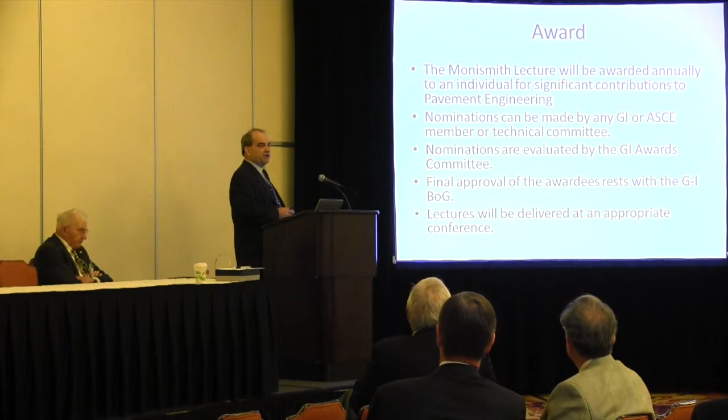So the first awardee is Professor Monismith himself.

Before I start, I'd like to first thank the Pavement Committee for establishing this award. I think it's very important that pavement engineering be brought to a higher status within the geotechnical field. Secondly, I'd like to thank the committee that generated the funds. Gary Hicks was the chair, but Rita Leahy and Jeff Hilliard were involved too. If they would just stand for a minute, I'd like to thank them.

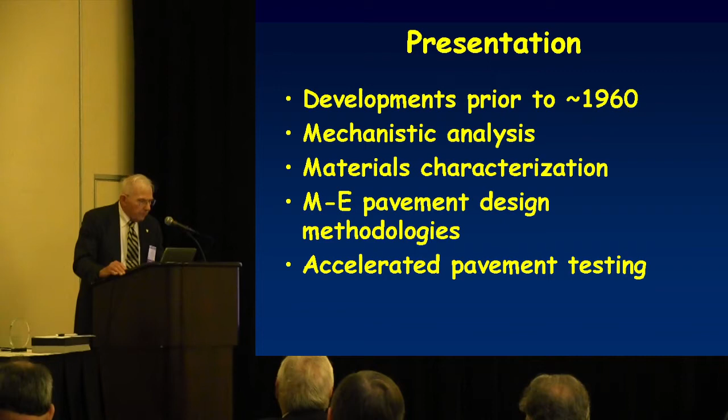I'm going to talk a little bit about the developments prior to 1960, then mention mechanistic analysis briefly, materials characterization, pavement design, accelerated pavement testing, which has become a very important part of the process, non-destructive pavement evaluation and overlay design, improved construction—because if pavements are not properly constructed, then everything goes to the devil—and then briefly pavement management, which has become very important in making sure we take care of our systems. And then I'm going to make a few observations on pavement engineering education and training.

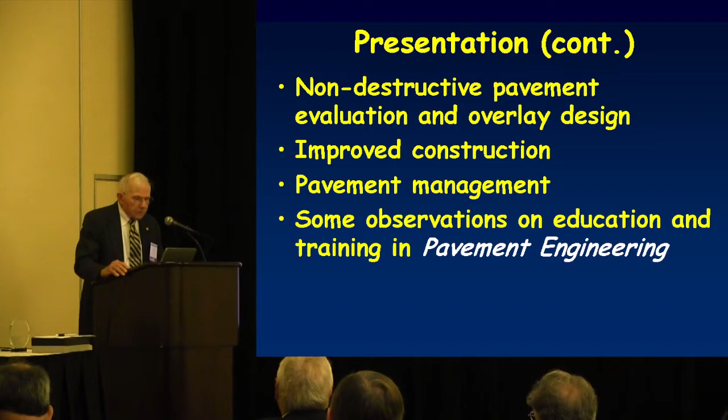I think there are some developments. I've just picked a couple of these very important ones, particularly the Corps of Engineers work in the 1940s and 50s at the Waterways Experiment Station: the use of Boussinesq analysis in pavements, full-scale testing at 13 test sites around the United States, and the use of the CBR, because there was nothing better than that at the time.

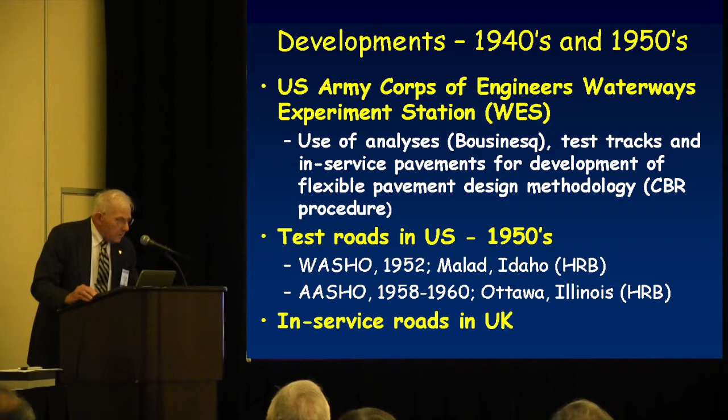Then second were the test roads in the U.S., particularly the WASHO test road in 1952, and then very importantly the AASHO road test, which really sparked renewed interest in pavement design from about that period of time. And then, of course, also in the late 40s and early 50s, the UK was doing a lot of studies of in-service pavements.

One of the key people at WES was Dick Ahlvin, and very importantly Bill Turnbull, who had been a very important part of the group. The AASHO road test really sparked the whole process, and the engineer in charge of the program was Bill Carey.

He was the engineer on the job, and he really did a very good job. He shielded his engineering staff from an advisory board that wanted to do many, many things. He really did a great job, and he also became chairman of the Transportation Research Board, or whatever you called the director at the time.

Sir William Glanville was the director of the Road Research Laboratory, overlooking some of the people who did the road studies. One of these was David Croney, and he, along with Glanville, participated in an event that I'll be talking about in just a minute.

Then a very important person who made significant contributions is right here in California: that was Francis Hveem. He introduced the idea of load equivalencies—it really didn't start with the AASHO road test, but rather with Francis. He stressed the importance of the tensile characteristics of pavements.

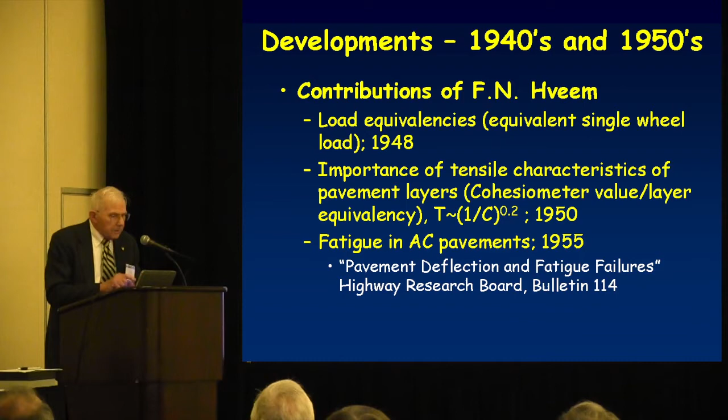Before, there was nothing given to the asphalt concrete—they just put so much above the subgrade. Then he brought about the development of the concept of fatigue in pavements. I think one of the classic papers in pavement engineering and soils is his paper in the HRB. This is Francis Hveem, materials engineer for a number of years.

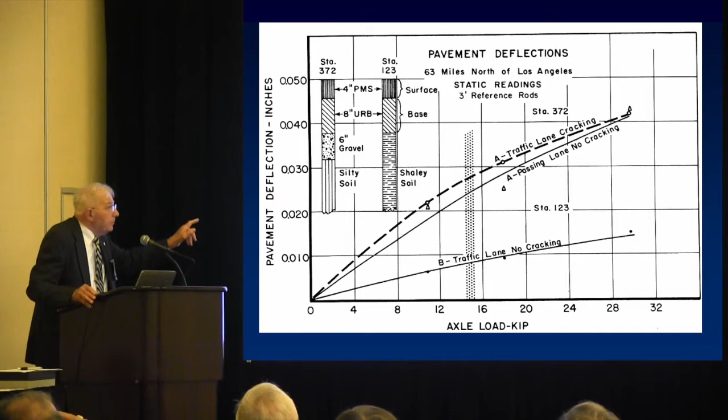In this particular case, looking at the slide, you'll see the two A figures and then the B figure. The B figure had very low deflections and heavy traffic, but no cracking. The other had higher deflections, and again, small traffic in the passing lane, but heavy traffic. This really sparked the idea of looking into the fatigue of asphalt concrete, which then led to this whole process of mechanistic empirical pavement design.

And then really what sort of gelled everything was the International Conference on the Structural Design of Asphalt Pavements in 1962. This was held at Ann Arbor, Michigan, and many people from around the world came to this conference. It was sponsored by the Asphalt Institute.

Jess Buchanan was the president. Fred Finn was really the workhorse at that time, and he had been the Asphalt Institute representative on the road test. Then they worked with Bill Housel and Ward Parr and developed a conference that really got the whole thing going. This is Jess Buchanan, Fred Finn in his younger period, Bill Housel, and Ward Parr.

And then some of the early U.S. participants: Gene Skok had actually worked on the road test and was involved at the Asphalt Institute before he went to the University of Minnesota. Bill Goetz of Purdue University, E.J. Yoder of Purdue University, and then some international participants, Norm McLeod from Canada.

Nijboer from the Netherlands. I can remember I met him at the lab, and I went home and told my wife that this is the hand that shook the hand of Nijboer. And she said, so what? But he was a great pavement engineer.

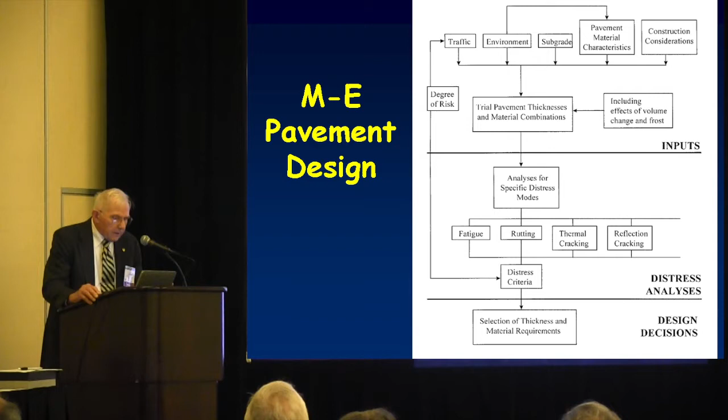Today the primary modes of distress are fatigue in the asphalt concrete or possibly in other treated materials, rutting and thermal cracking, and then also, particularly for overlays, reflection cracking. So you put this all together and you find out how the best combination of materials can be attained and developed along the life of the pavement.

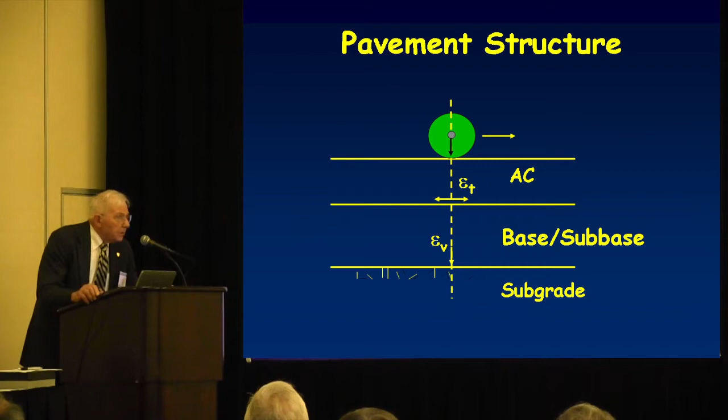In the case of the development of asphalt pavements, a very simplistic representation is a structure of this type. We have the tensile strain at the bottom of the asphalt concrete or some treated layer, and in this case, we show the vertical compressive strain at the surface of the subgrade. Many of the design procedures that evolved from a mechanistic empirical standpoint were built on these principles.

One of the important analyses that developed was the ability to look at multi-layer elastic analyses. Burmister had done this in the 1940s, but we didn't have electronic computers at that time. In 1965, Chevron developed a multi-layer program that was very effective. I don't think they really received the proper credit for this, but they developed this, and it led to the program ELSYM and other developments.

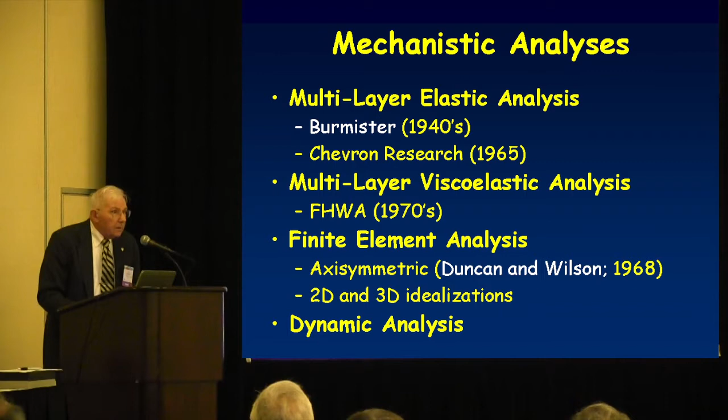Now, in terms of material characteristics, we can start with the asphalt. This material is a nonlinear, rate-dependent material. So how do you treat it? Well, we treat it in terms of stiffness, where we take into account the effects of time of loading and temperature, and try to utilize that information in the design using primarily elastic systems today in the design methodology. Some of the key people doing this in the early 1950s were Van der Poel, and then Heukelom and Klomp.

And of course, the untreated materials are also nonlinear, not so much rate dependent, but we still try to, in an ad hoc manner, use properties that we get from laboratory testing or from field testing to get a measure of moduli that we can use in these multi-layer elastic analyses.

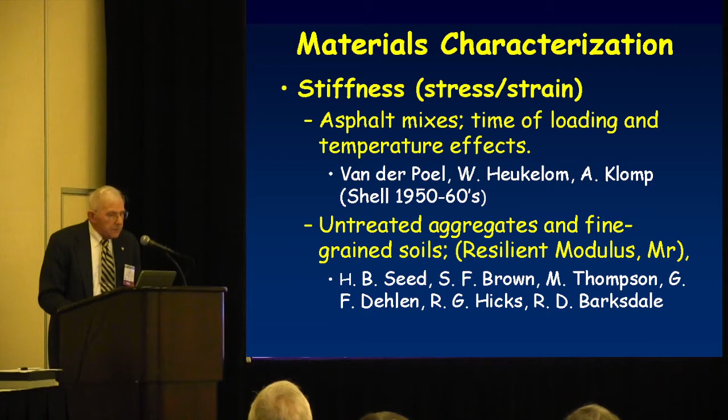And some of the people involved are Harry Seed, Steve Brown from Nottingham, Marshall Thompson, George Dehlen, Gary Hicks, and Dick Barksdale.

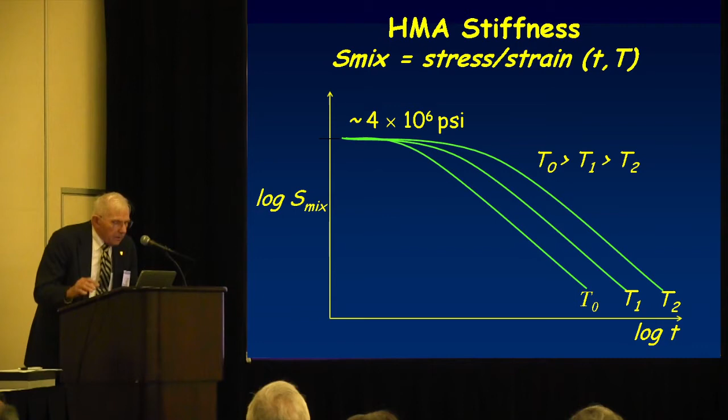Generally, when you look at the stiffness of asphalt mixes, the behavior at very short times of loading is about the same as concrete, and at low temperatures, and of course, longer rates of loading or longer times of loading, then the moduli drop off. You can see how this happens. The temperature T0 there is the highest temperature, and T2 might be something much less.

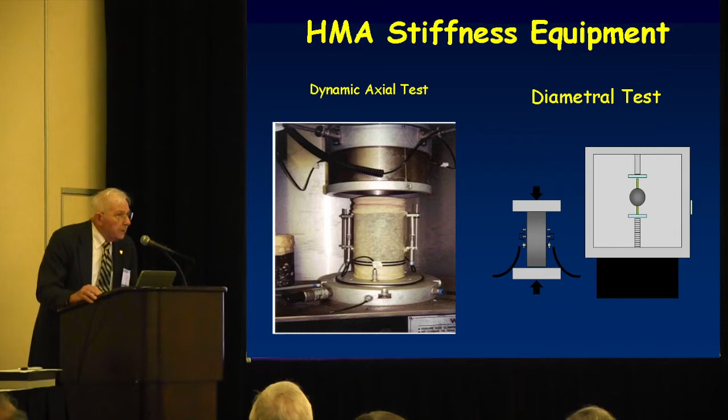Now, in the case of fine-grained soils, we realize that we have to consider the water content, dry density, soil structure, the applied stress, and today we measure it usually in terms of repeated load triaxial test and a resilient modulus developed. Actually, Harry Seed introduced this in the early or late 1950s.

And of course, we have to consider then, particularly not necessarily saturated soils, but partially saturated soils. So we have to also look at the matter of suction and then freeze thaw.

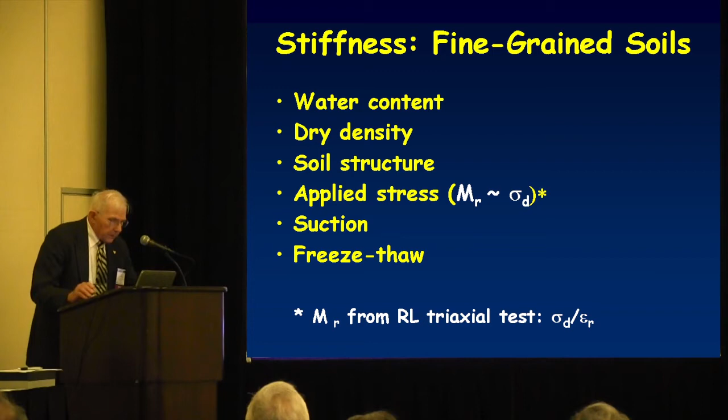And in the case, as I say before, the modulus of resilience is developed from repeated load tests, where you take the deviator stress divided by the recoverable strain.

And Harry Seed, of course, was a good soil mechanics person, but I show my age when I talk about soil mechanics rather than geotechnical engineering. So.

And he started the resilient modulus testing, and his work led, of course, to then the dynamic loading that got involved for liquefaction. Steve Brown did work for looking at various states of stress, including suction. Marshall Thompson did very good work on the freeze-thaw behavior of soils.

And of course, very importantly then, we have to recognize that when we're doing the materials for pavements, specimen preparation is very important. And of course, what are going to be the conditions? Well, the Corps of Engineers for the CBR test use saturated soils. But we have to realize that many soils don't become saturated.

And the Australians and the UK Road Research Laboratory did a lot of work on measuring soil moisture suction and for partially saturated soil. So some of the designs that we use are based on soil moisture suction considerations rather than saturated soil behavior.

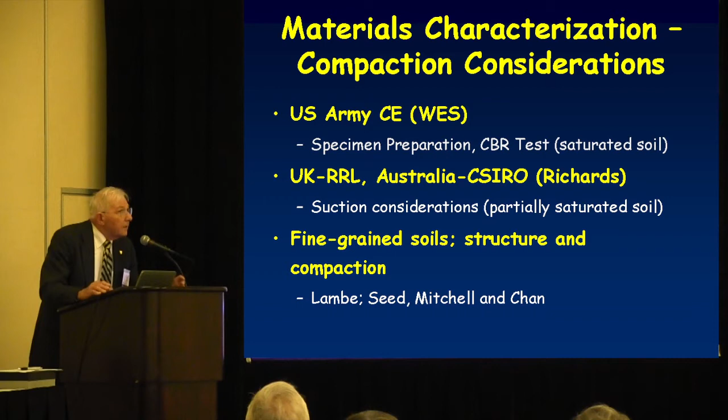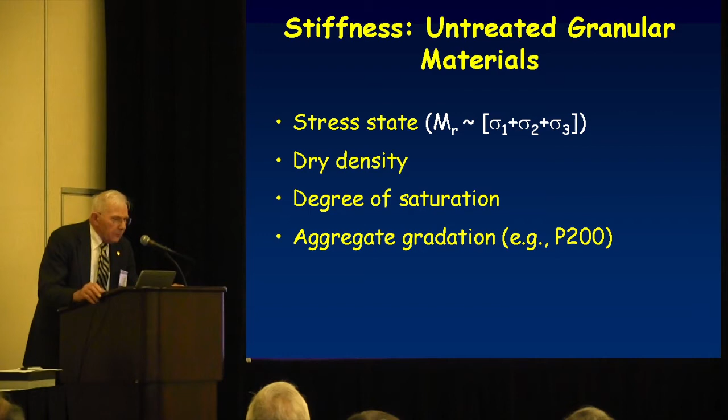Then for the untreated granular materials, we have to recognize again that this is a nonlinear material, but a modulus, again, measured in a repeated load type test, is a function of the sum of the principal stresses. And of course, dry density has an effect, the degree of saturation, and the aggregate gradation.

And some of the people that did work in this area were George Dehlen from South Africa, Gary Hicks, who's sitting here in the audience, and Dick Barksdale, who unfortunately died at an early age.

And so then the next thing that we have to do is we have to take this information and put it into these analyses to make distress analyses. And so the three that I've mentioned to you are fatigue cracking, primarily hot mix asphalt, permanent deformation, rutting, thermal cracking, primarily low temperature cracking.

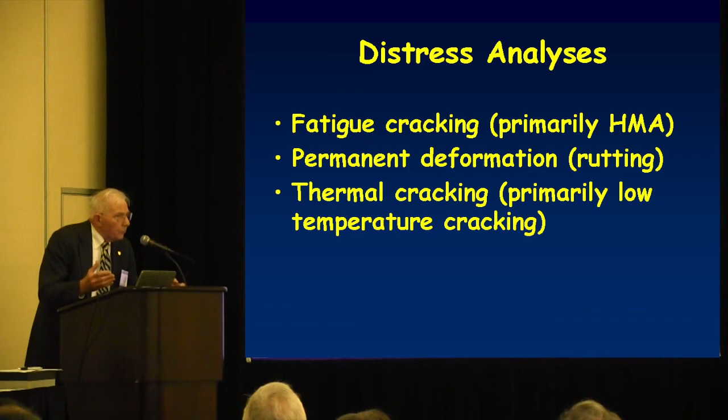Well, in the case of thermal cracking, primarily the binder selection has become very important today. And with the new grades of asphalt that we have, we've mitigated to some extent this problem of thermal cracking if you choose the proper materials and you properly compact the pavements.

And so in the fatigue test development, this occurred both in Europe and the United States. Shell supported the work at Nottingham, and Peter Pell, one of the really very important people in this area, and R.N.J. Saal was from the Dutch KSLA.

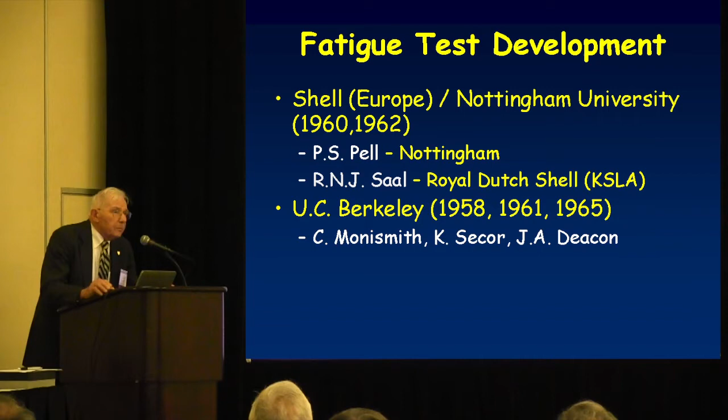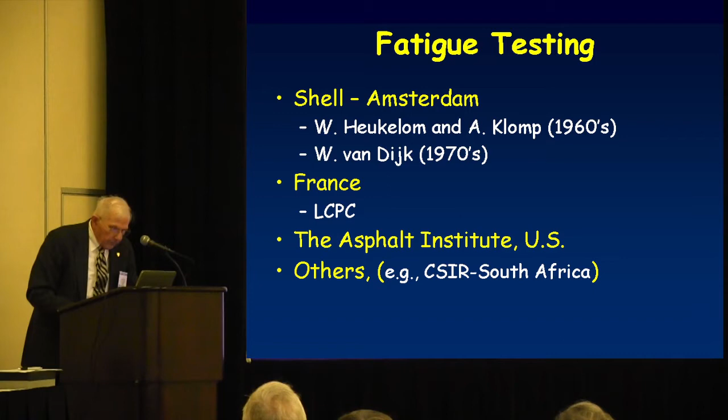And then the fatigue testing also expanded. Shell did a lot, Heukelom and Klomp, van Dijk in the 70s. France did a lot of work, the LCPC in Paris, the Asphalt Institute, and then others, for example, the CSIR in South Africa, and we'll see more of that a little bit later.

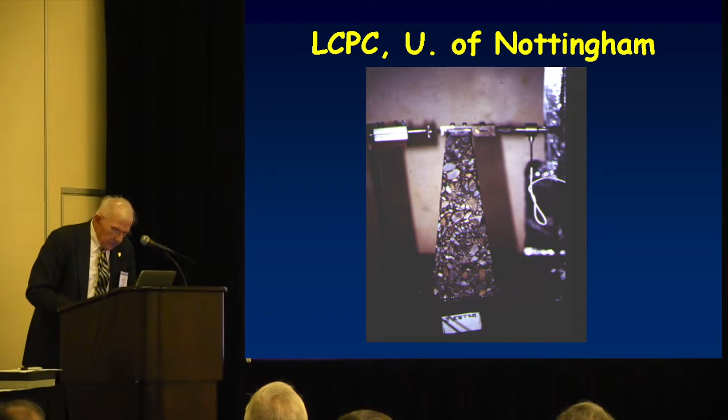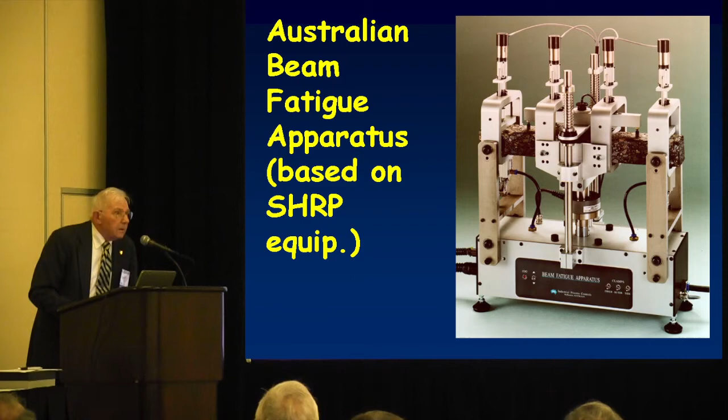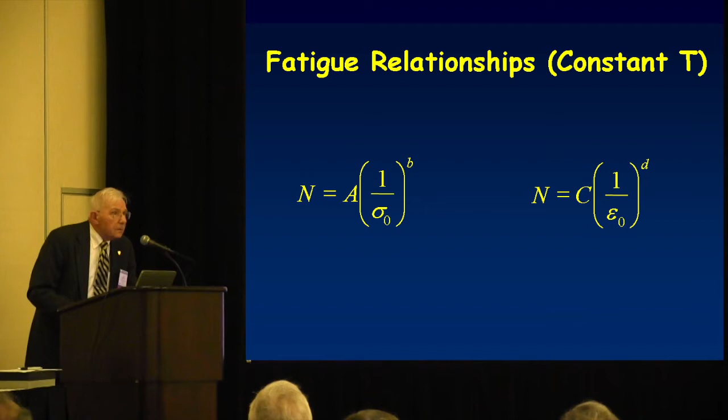And then it so happens that the fatigue of mixes can be inversely proportional to the stress or the strain. And normally we use the strain. It's a measure that we can actually look at. And they say happiness is a straight line on a log-log plot. And so in this case, at least over some range, the strain is proportional logarithmically to the number of cycles to failure. Normally you should plot this the other way because strain is the independent variable and NF is the dependent variable, the cycles to failure.

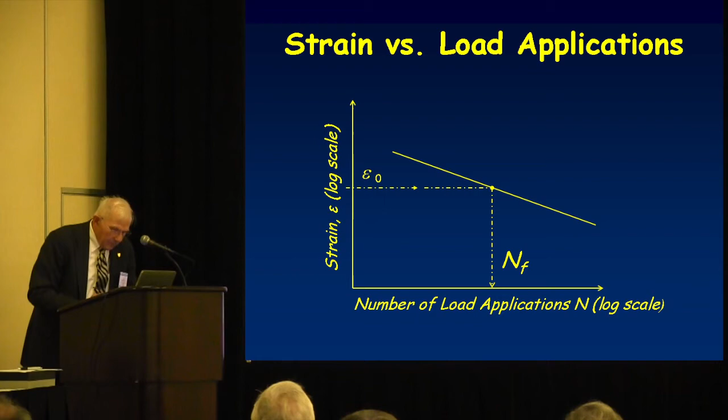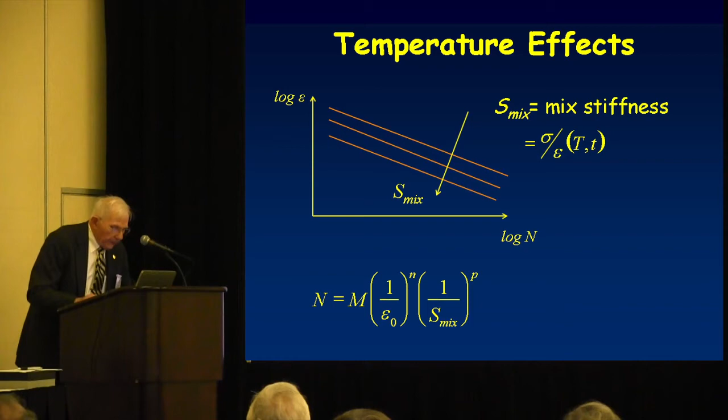But we use that then in design, and we have, of course, temperature effects that we have to consider because asphalt is a thermo-rheologic type material. And as the stiffness increases, as you look at the slide there, the strains at break go down. And so generally we have an equation of the form that you see, where the cycles to failure is a function of the strain and the stiffness of the mix. And there are other factors that will be involved in this as well.

And then, of course, the problem is that traffic is going to have different load levels. And so how do we combine these? The concept of the linear sum of cycle ratio, some people refer to it as Miner's hypothesis, was suggested by Ken Peattie of Shell. And actually Jack Deacon then did a very detailed study looking at load effects in different sequences, and it seemed to be reasonable.

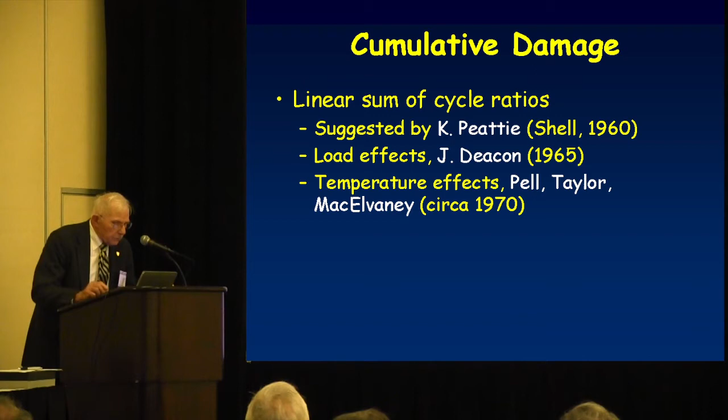Now some people argue that this is not a very good system, but it works from an engineering standpoint. And you have to realize that in any kind of field, when we're doing designs, we have to think as engineers and not as scientists. We have to make sure that we can get something that is going to provide a reasonable answer, and this seems to do that.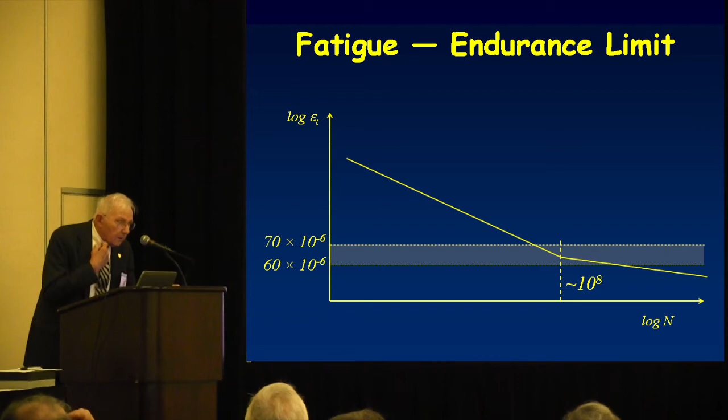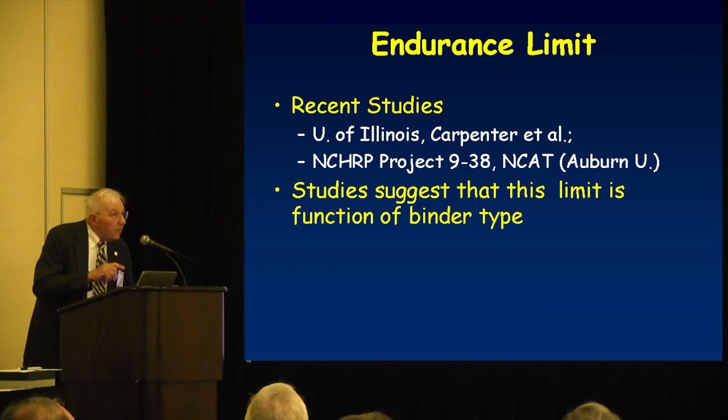So people have been looking at that more recently, and very nice work has been done at Illinois by Carpenter and the NCHRP projects. These studies have indicated that maybe, depending on the type of binder in the mix, there may be different strain levels where this might happen. And of course, then we always have to throw in a booger factor, and we call it a shift factor, to relate the behavior in the laboratory to the behavior in the field.

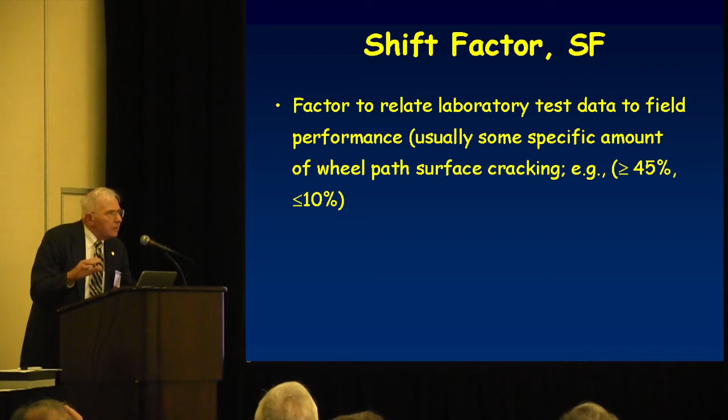And so some shift factor format is developed, and we relate it to some percentage of cracking in the field. Normally, in the case, for example, of some procedures up greater than 45%, others 10% or less. And normally when you get up to about 10% cracking, the pavement is sort of on the verge of failure.

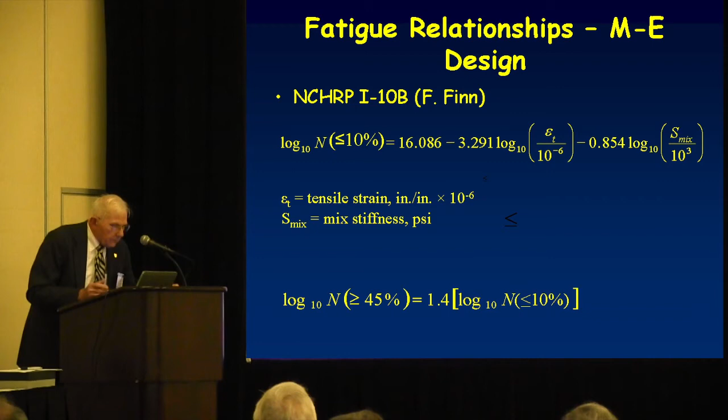Now, this is one of the first works supported by the NCHRP to look at mechanistic empirical design, and it turned out that Fred Finn developed the relationship that eventually was also used by the Asphalt Institute. You can see then the inverse ratio to strain, the inverse ratio to stiffness, and the fact that when you look at 10% cracking versus 45% cracking, there's about a 40% difference, at least for the data that were available at that time. These were based on thicker pavements, 4 inches or more. And then Matt Witczak, when the Asphalt Institute adopted this formula, then added the capability to bring in the effects of the asphalt content and the degree of compaction of the mix, which is a very important consideration.

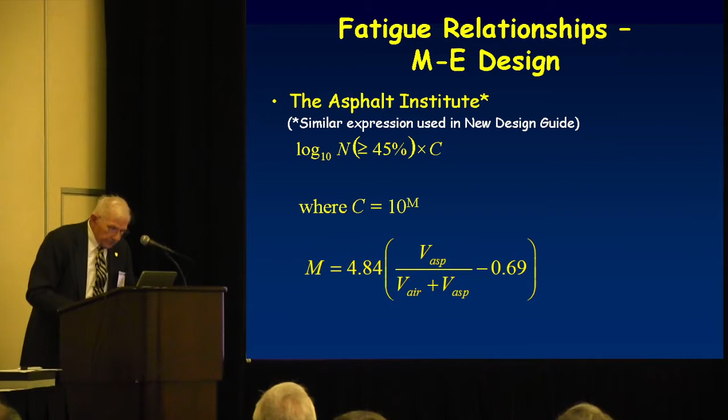The fatigue relationship used today in the MEPDG has this form: there is a factor for the mix volumetrics, the strain, and the stiffness. This is a design relationship that seems to work pretty well.

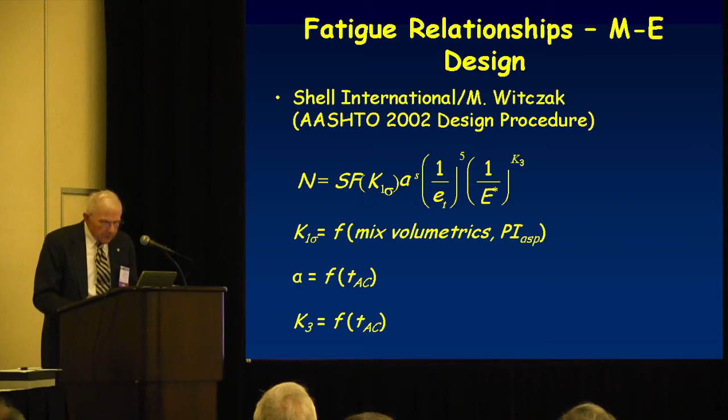Permanent deformation is also a factor that comes into play, and we have to make certain that the pavement components don't contribute very much to deformations at the surface, because if you develop rutting and you have rain, you have the possibility of hydroplaning. So we have to be very careful about that.

In the case of the untreated components, the load stresses and shear stress at the surface of the asphalt or the aggregate base and subgrade are a factor.

Another factor I've alluded to in the past is the vertical compressive strain at the surface of the subgrade. This was suggested by Dormon at the 1962 conference, and Shell really had, at that time, a scheme in mind for a mechanistic empirical design procedure, which involved the vertical strain and the fatigue in the asphalt concrete.

For the asphalt concrete itself, primarily shear deformations occur that lead to rutting, and this is in the upper part of the pavement surface, the upper 4 inches in highway pavements, probably a little thicker for airfield pavements. This can be controlled primarily by mix design and construction, but we still have to make some estimates of the actual rutting that might develop.

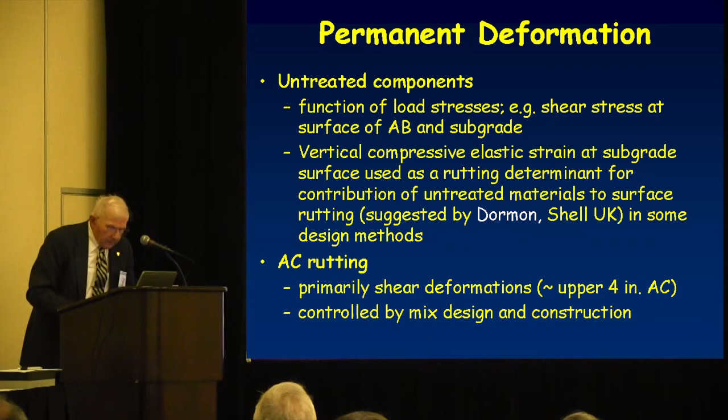These can be considered as part of the design procedure, and if you're going to be developing long life pavements, you might think in terms of the endurance limit in the asphalt concrete, and also this endurance limit in terms of the contributions of the untreated materials to deformation at the pavement surface.

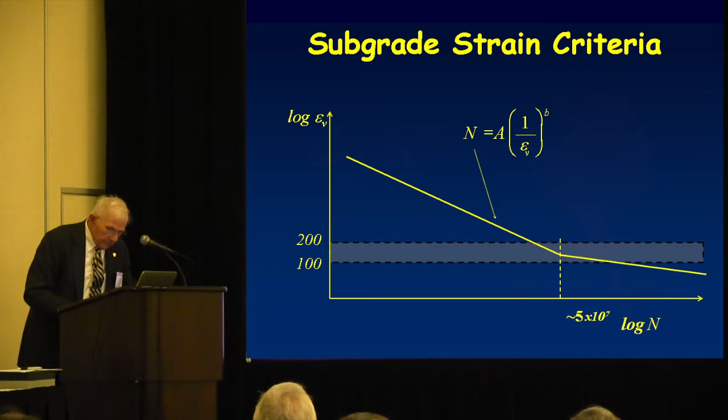Gil Dormon, actually, he and Harry Seed were colleagues at King's College in London there back after World War II.

Now, the prediction of permanent deformation - there are a number of procedures being developed, but one that is in the MEPDG, as I understand it, is what is called the layered strain procedure, and I'll briefly show you that.

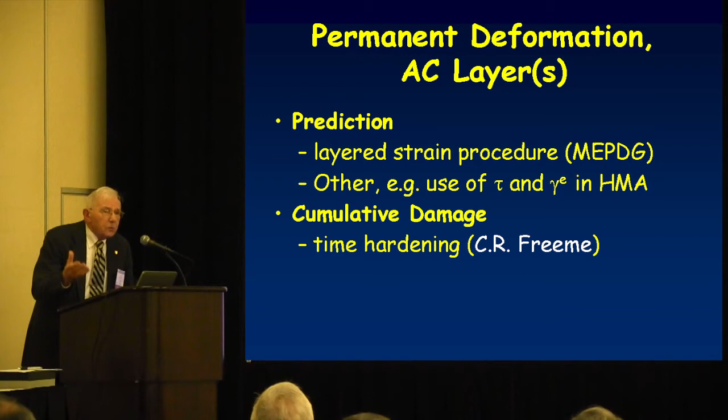Then there are others, such as was developed during the SHARP program and at the WesTrack. And then there is this matter of cumulative damage, or the accumulation of repetitions of permanent deformation in the pavement structure.

This represents sort of a very quick schematic. What is done is to actually look at the state of stress and calculate a plastic strain developed again from repeated load tests, and you do this through the various components.

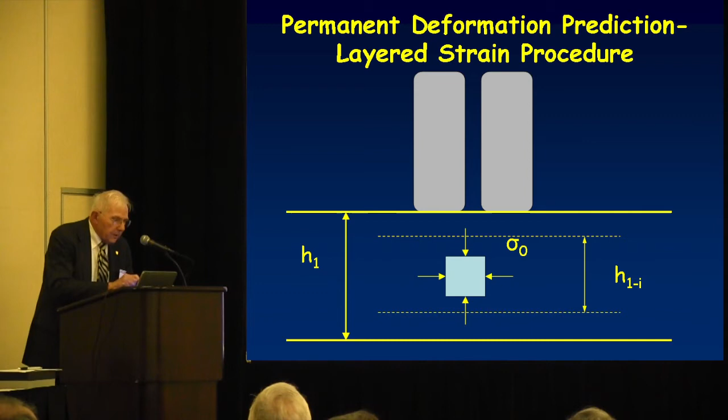You sum the components of each layer, and taking that sum, you arrive at the rut depth at the pavement surface. So it's a pretty direct procedure looking at the states of stress and the plastic strains developed in the pavement materials.

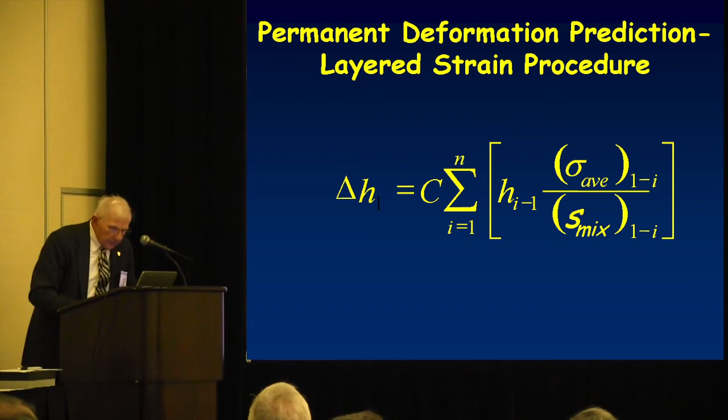Compound loading is an important process again, as we had shown in terms of pavement fatigue. In this case, the time hardening concept taken from metals has been used.

You have different strains where you show the number of load applications versus the inelastic strain. If you have one load application, you move up the curve, and if you have a different one, you add to that, and so forth, back and forth. This is actually built into the MEPDG to look at the cumulative effects of traffic on pavements.

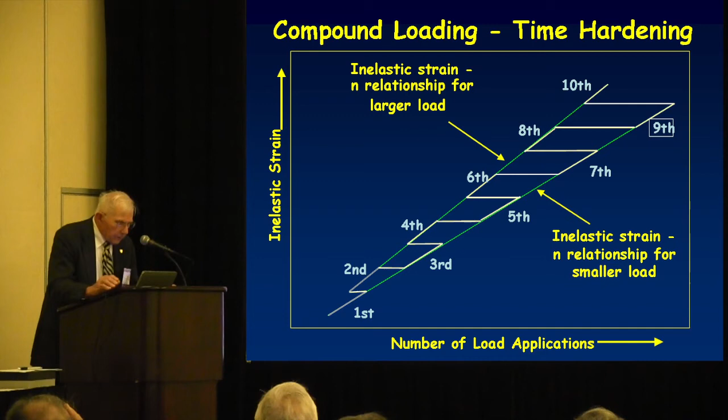This was suggested by Charles Freeme back in the early 1970s from South Africa, and Shell quickly picked that up, by the way, and built it into their mechanistic design procedure.

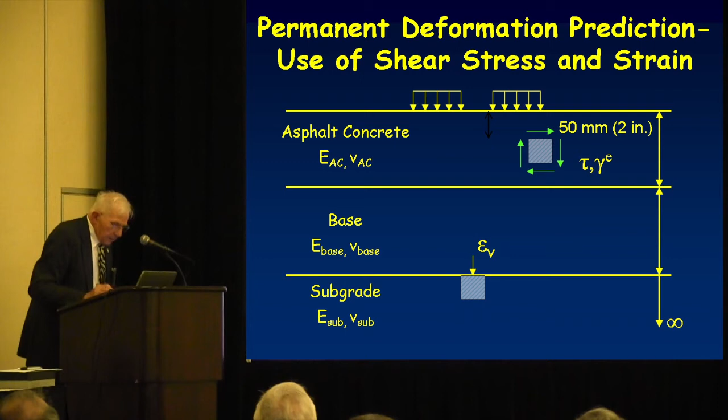The other approach is the use of the elastic shear stress and shear strain, and the procedure then involves calculating...

permanent deformation for a given stress and a given elastic strain and a specific number of repetitions, and then you just sum that. In this case, through finite element analyses, the rut depth is just equal to some coefficient times the sum of those plastic strains, and this is only in the asphalt concrete.

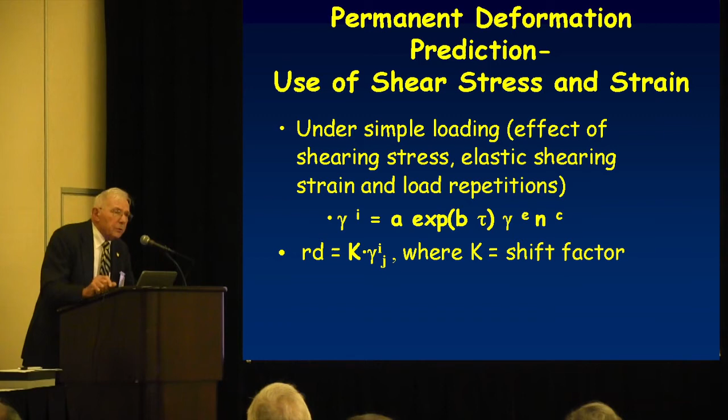So this would be a way of looking at the asphalt concrete. If you have a well-designed pavement, using the vertical compressive strain concept, you get a very small contribution at the pavement surface because of the underlying materials.

Now, low temperature cracking—there is a prediction in the new design guide. It involves the indirect creep and tension test, the thermal stress restraint, or just the indirect creep and tension test, with an analysis procedure developed that is in the MEPDG.

Another way of looking at low temperature cracking is the thermal stress restraint specimen test. Ted Vinson, one of the men in the room who was very involved in this, developed a test that was very helpful in looking at the behavior of mixes, where you restrain the mix, drop the temperature, and eventually get a thermal stress that cracks the mix. This seems to work pretty well, and many people, particularly in Europe, use this as part of their design methodology for looking at mix behavior at very low temperatures.

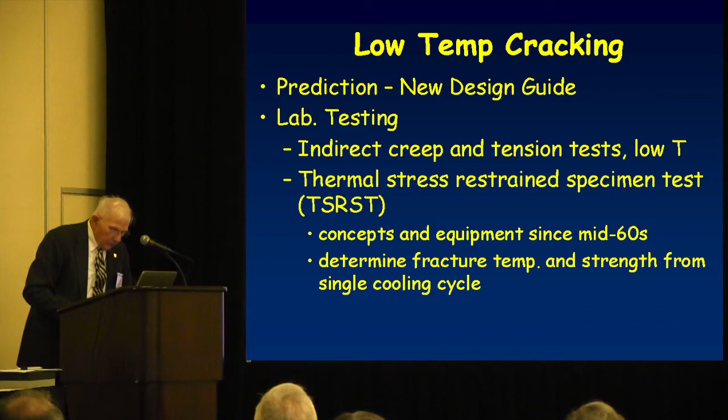Now, mechanistic empirical design analysis—the US Navy actually had a procedure using the Burmister work in the 1940s. But the key developments since then came from Shell: Dormon and Peattie developed the Shell pavement design procedure. Fred Finn and a group developed a system that was a forerunner of the new AASHTO guide, in the late 1960s, early 1970s. And then, of course, we now have the new mechanistic empirical design guide, where Matt Witczak played a very major role.

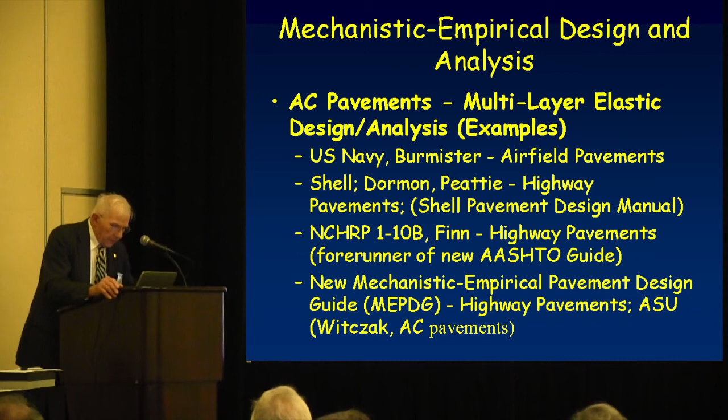Pim Visser was the person at Shell in charge of developing the Shell Pavement Design Manual. At the Asphalt Institute, Jim Shook, Matt Witczak when he worked for the Institute, Fred Finn, and Larry Santucci were involved in developing the current design manual framework. The LCPC also developed their design procedure—Belgium, just as an example.

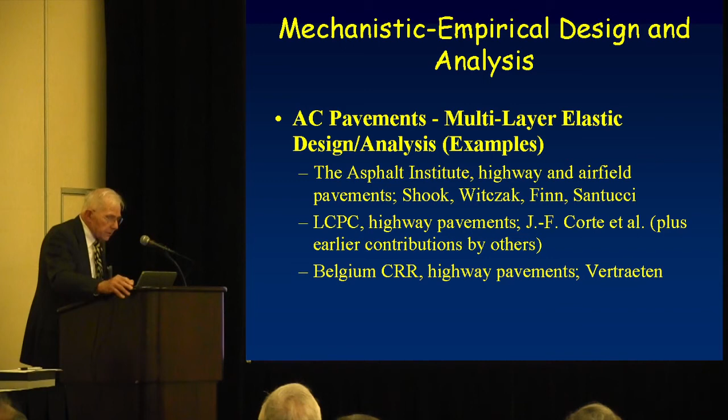Verstraeten from the CRR in Belgium did a lot of initial work on mechanistic analysis and then developed their design procedure. Other examples include the CSIR in South Africa—it's interesting that a small country has one of the best research programs in the pavement area in the world. We were fortunate in the 1990s to begin working with them, and they are now part of the research team at Davis and Berkeley. Some of the key people from CSIR were Charles Freeme, Neil Walker, and Hoffy Maree.

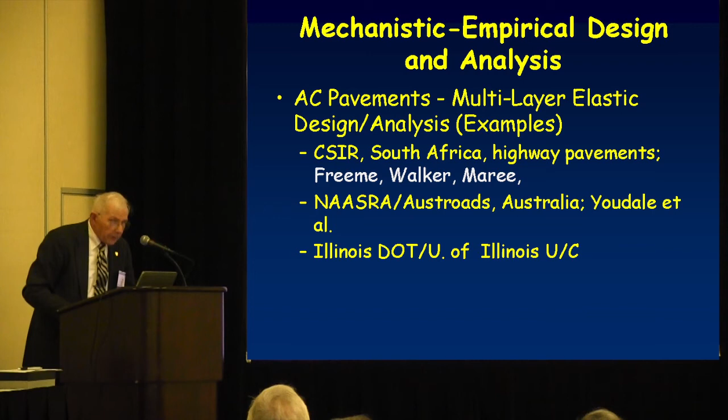Very importantly, we have to recognize the matter of reliability. For ideal pavements, we like to design to a high level, normally in the range of 90 to 95%. Fortunately, today we have the ability to do this because we can develop information on the materials, construction, and traffic variance that might exist, and the use of Monte Carlo simulation allows us to do this.

I say 'we,' and people ask, where do you get this 'we' business? Well, I can't do it myself, but other people can.

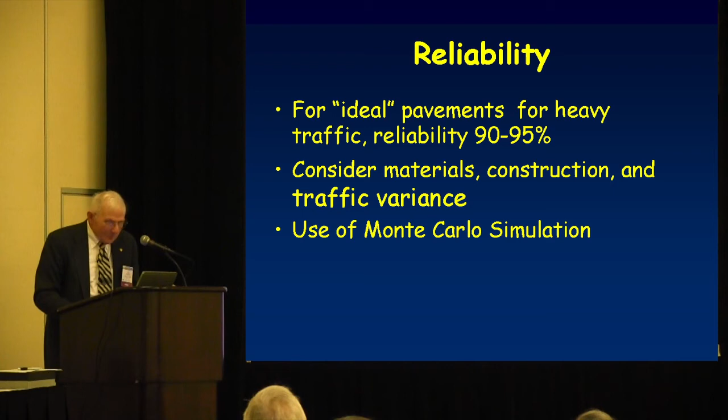Non-destructive testing has become a very important part of our process, because many of our pavements today are being redesigned or having overlays placed. One of the things that happened was at the WASHO Road Test, a man named Benkelman developed the Benkelman beam.

He did that originally at the WASHO road test, perfected it at the AASHO road test. And then in France, a device called the traveling deflectometer, also known as the deflectograph, was developed, and people at TRRL really made it work well under Norm Lister's direction. California also developed a traveling deflectometer that they used for a time, but it's no longer used, and that was developed under Hveem's watch.

In the case of vibratory testing, the Shell people started back in the 1950s using a heavy vibrator, and they assumed all the waves in the pavement from the vibrations were shear. It turned out they're not, and the wave propagation work at TRRL began to take advantage of seismic studies looking at Rayleigh waves, shear waves, and P waves, or compression waves, trying to interpret those as you vibrated the pavement at different surface frequencies. These would allow you to actually get measures of the moduli, or stiffness, of the various layers.

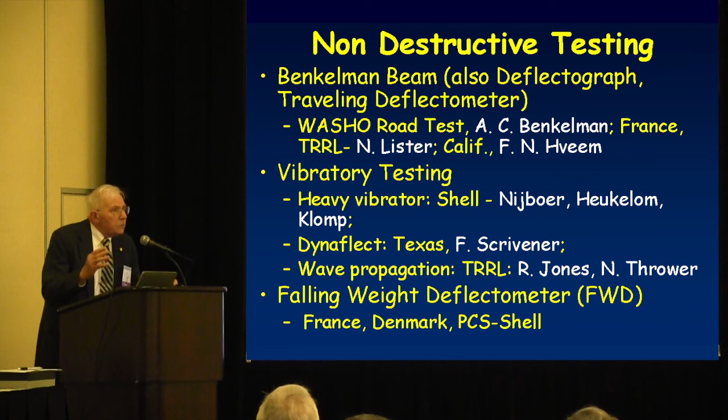There was also another device developed in Texas called the Dynaflect, used for years. The problem is it provides a relatively light load to the pavement surface. But since these other developments, the falling weight deflectometer was developed in France, but Denmark really made it work, and the Shell people also developed it to an extent where it could be used in very practical applications. This is the device used today to measure pavement deflections, and then use that information to calculate, by back calculation procedures, the moduli.

Overlay design, normally when we started this early on, was based primarily on deflection measurements, and one of the real good design procedures developed at that time was by Lister, because he built reliability into the design methodology based on their analysis of deflection data.

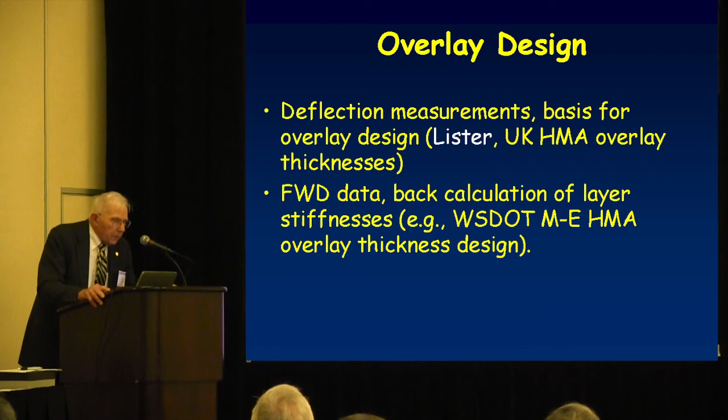Then the FWD, of course, allows us now to measure the basin, actually measure and calculate stiffnesses in the various layers. A very good example of this is the WSDOT HMA overlay thickness design.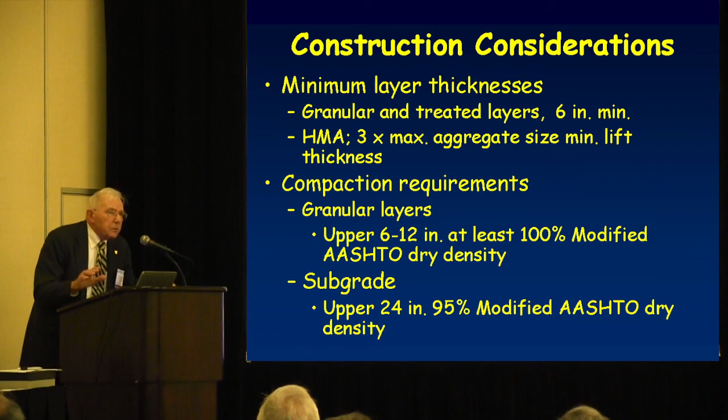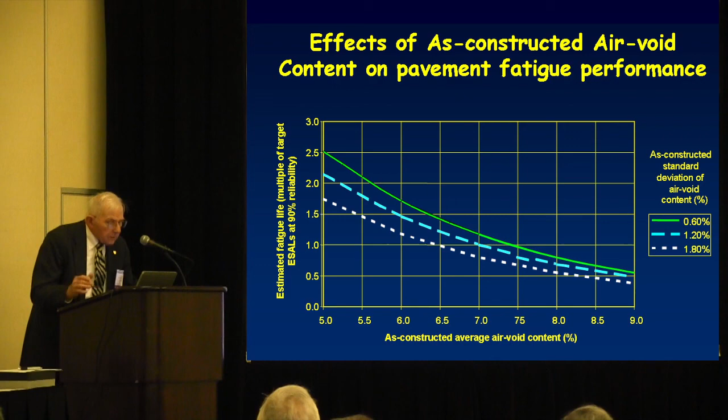Construction considerations - I'll just note here that compaction is so important that you have to make sure you do compaction, but at the same time you also want to ensure that when you put materials into the pavement, you go to the target value, like in this case for air-void content. You want very low standard deviations so that you have good pavement performance. And you can see, if you change the compaction, you take away life of the pavement.

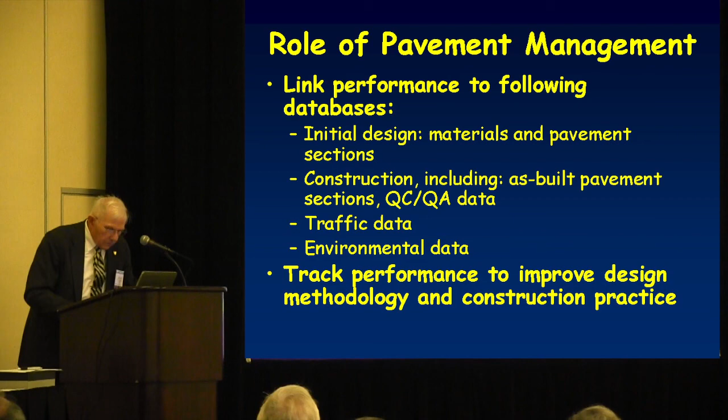Then pavement management, of course, we have a number of systems. Fred Finn again was very, very important in the development of that. Ron Hudson, Ralph Haas, these all started together about 1970. And Roger Leclerc really made the one at WashDOT work. The role of pavement management is important to help us look at the behavior of pavements and improve our designs as we go along, making good decisions rather than just doing this and that to take care of the pavement.

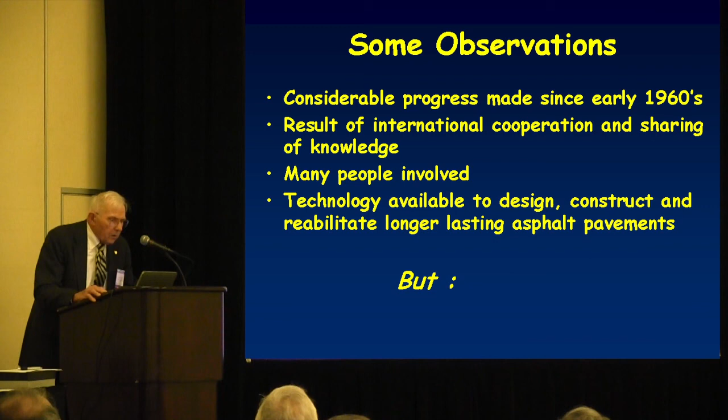But well-educated engineers and technicians are required in the pavements area to properly accomplish this. Education and training is important for engineers, technicians, and construction maintenance personnel. One of the things that concerns me is that many universities in the United States are no longer teaching pavement engineering. I think that's bad, because we spend over $100 billion a year on pavements just in the United States. So the solution is that you have to make sure you have trained people doing the job, through self-managed learning, technology transfer, and it involves not just the engineers, but the technicians and the construction personnel.